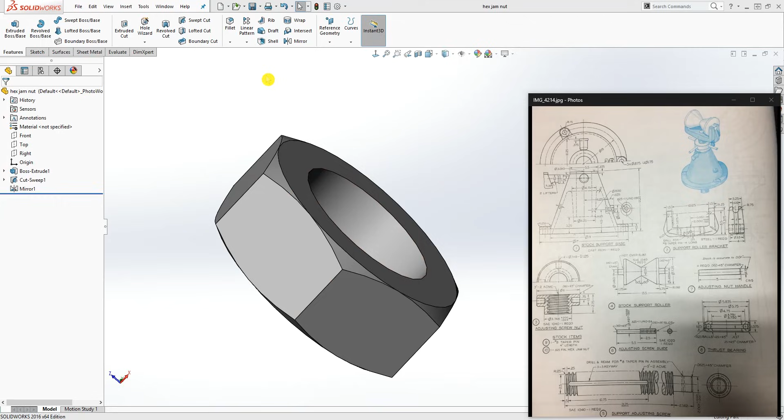So now we have designed all of our parts, and I believe your instructor is supplying you with the bearing. So we're just going to start a new assembly file and start putting everything together. New assembly, okay. And the first part we are going to bring in is the base, because that base is going to be fixed and everything else is going to be mated to it.

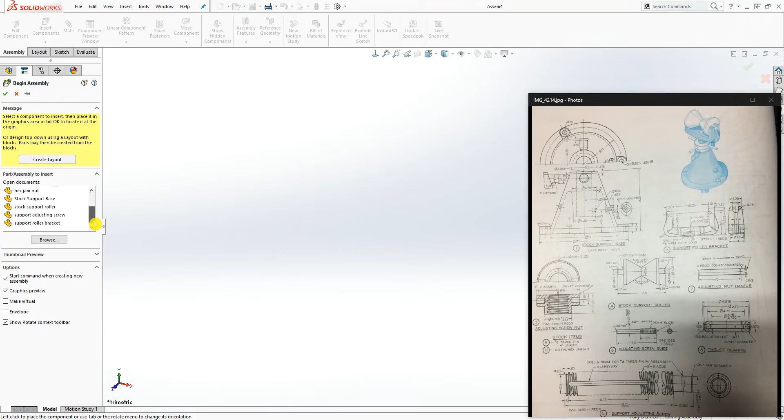So just browse. If you still have all your parts open, everything should show here to insert. I'm just going to find the base, the stock support base. I'm going to select that, and now I can move it around, but don't click in here, just click this checkbox to drop it, and that fixes it for you.

So that means the plane in the assembly and the plane for this part are both on the same plane and origin point, and this is fixed, which is the F. So now we have this part in, we're just going to bring in the rest, working from the bottom up.

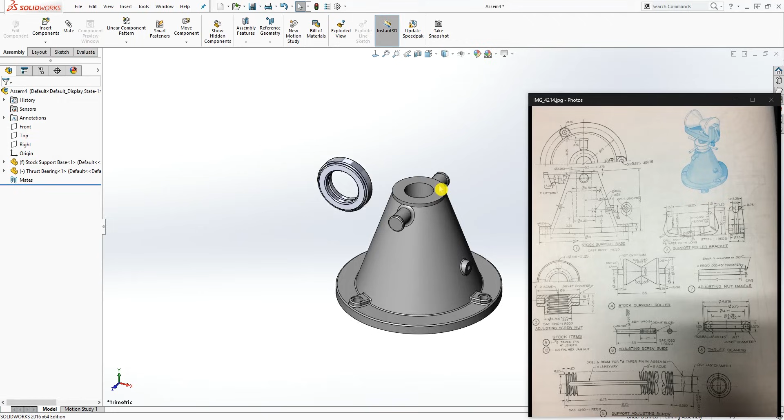So the next thing is the bearing. I'm going to insert components, browse to where I have the bearing, and bring that in. I'm just going to click once on the screen, and the mate I'm going to add is click mate, and click this face and this face. You want to make those two together, and I'm going to drag this up a little bit, and we want to mate this bottom face to this bottom face, and the top face of that, and click OK.

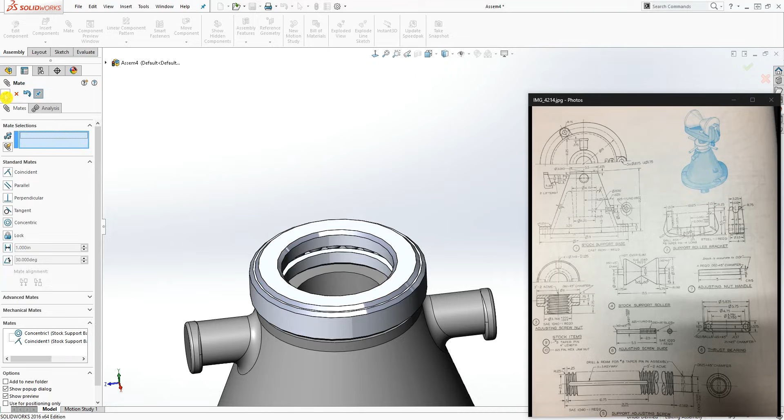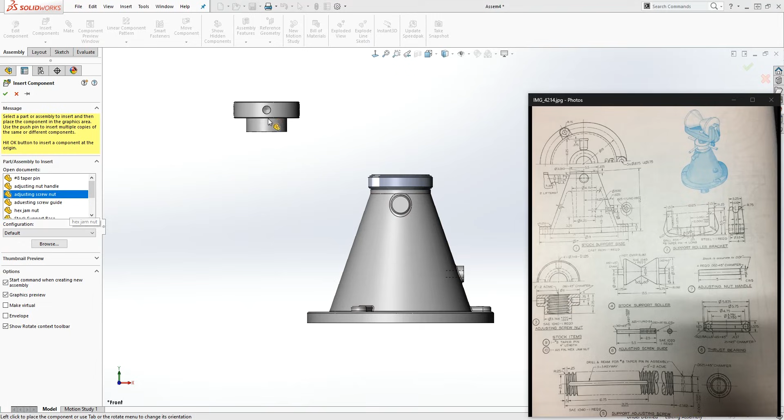And we are done with that one. That's the first mate we need. Now we are going to bring in our next part. I'm just going to go to the front plane of this. So bring in your next part, insert. Your next part will be this adjusting screw nut. Bring this in, and I'm going to select this.

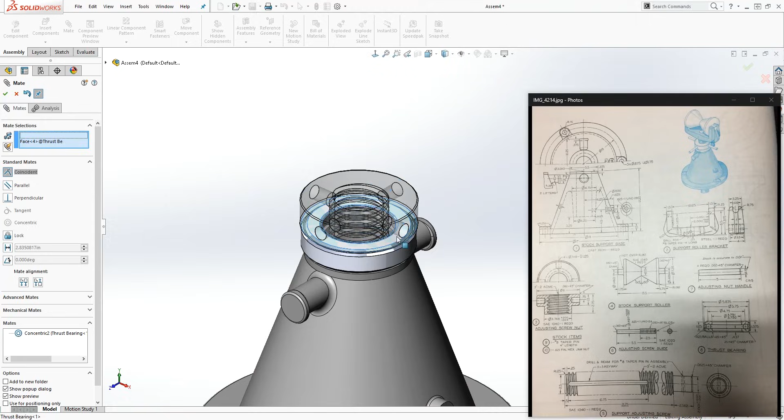You can mate, select this, any one works, this face and this face, mate those two together concentric, and we're going to select this face and mate it to that face, and click OK. Good, so now that is done, and the next part we can bring in is the adjusting nut handle.

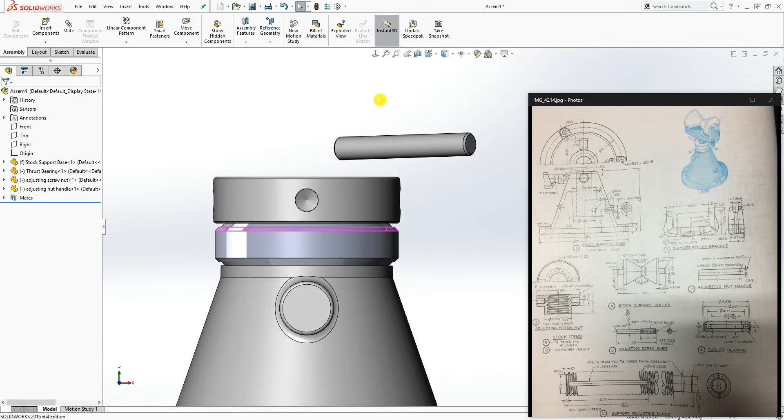So insert adjusting nut handle, just going to bring that in. I'm just going to, when we mate it, we want to fix it. So let me find the front plane of this part, which is right here. We want to be mating this to one of these circles, either this one or this one, because we are going to use this plane to constrain it. So you see what I mean. So I'm going to mate this face circle, that face to this face.

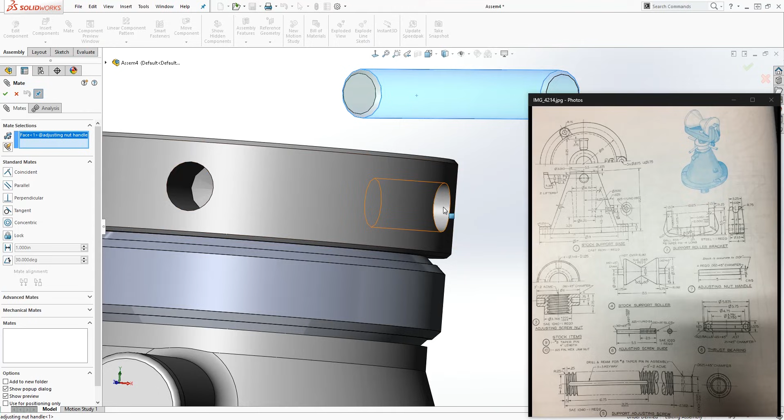That'll be a concentric mate. I'm just going to drag this out a little bit, and I'm going to mate this face to this inside edge, zooming in on the inside edge, and that will be coincident, and I'll click OK for now.

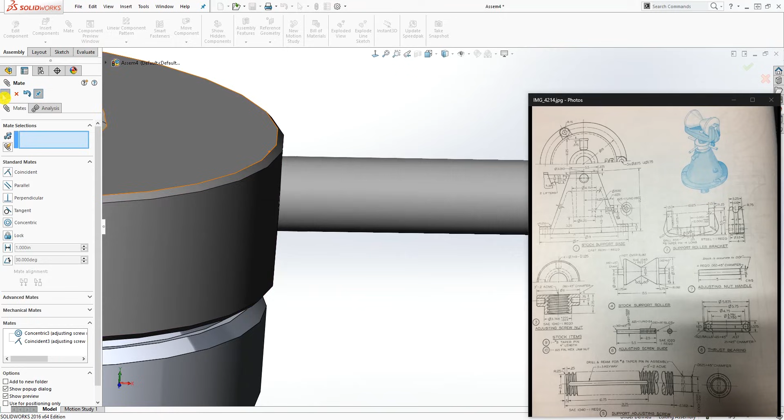And the reason why, see how this is still spinning, is that we want to fix it because we're going to be using this to spin it around. So I'm going to find, I think it's the, let me see, yes, the right plane of this.

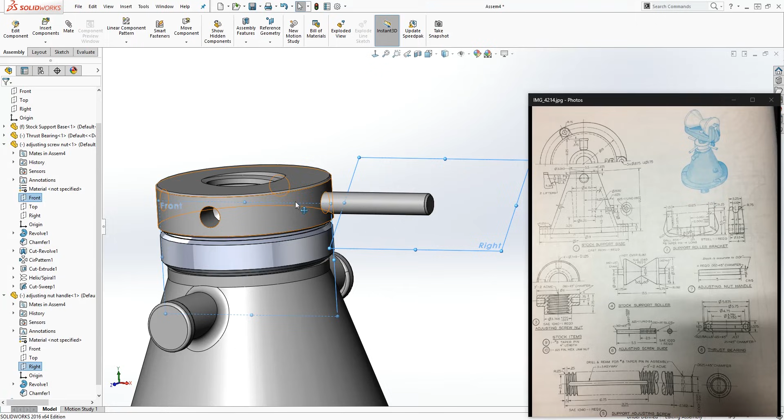So the right plane, if you click on this adjusting handle and drop down the right plane, I want to mate it to the front plane of that adjusting screw. So the right plane of this mated to the front plane, just mate the plane so that way they are both coincident with each other, and click OK. So now if I move this around, I can use this to spin that around, which is what I want.

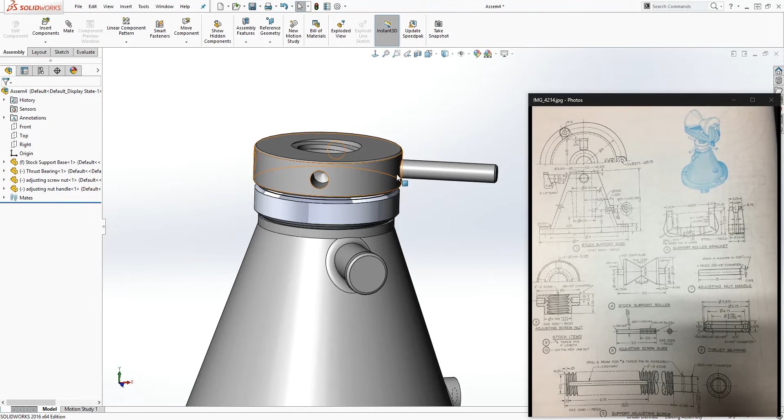Good, so I'm just going to minimize this, and the next thing we want to do is, instead of putting this in four times, we can use the circular component pattern. We select the circular edge and the components to pattern, select this, and use equal spacing four times, and that puts all those components in for us. We are done with that part, and we're moving on.

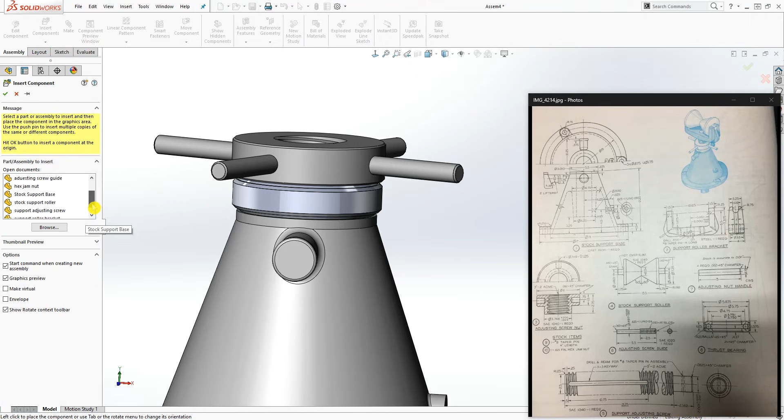The next part we are going to insert is this bracket. So browse, insert component, I'm going to find my bracket, support roller bracket.

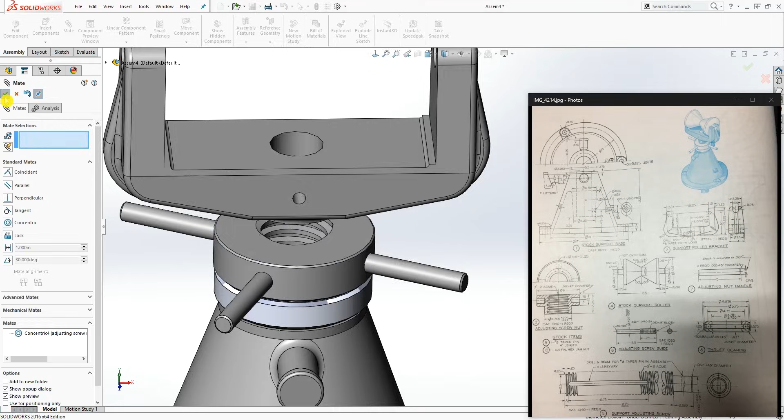Let's bring it in, click, and again we want to mate. You can mate this circular face. Any circular face you see, you can mate it to any circular face. So this circular inside, I can mate it to this outside, and that gives me the concentric, and that's that. So this part is moving up and down, but it's still spinning, but it's not supposed to spin.

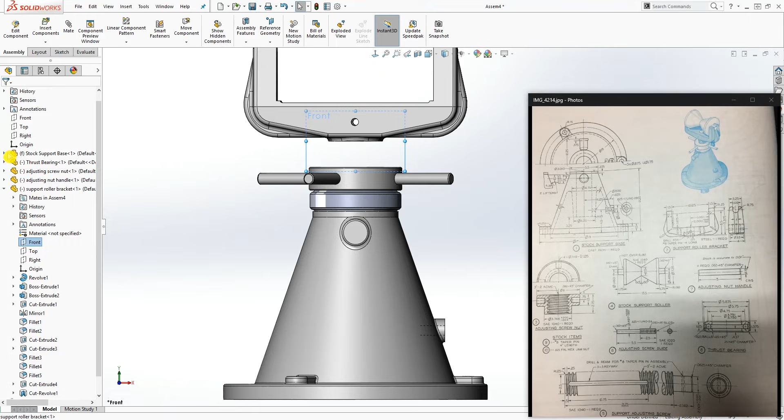It's supposed to stay fixed. We know this is the front, so let me go to the front. So that's the front view. And also make sure that this bracket, you are on the front plane of it, which we are. So now we want to mate the front plane of this bracket to the front plane of this base, because that's how we designed it. So the front and the front mate. So that gives you a coincident, and click OK and OK.

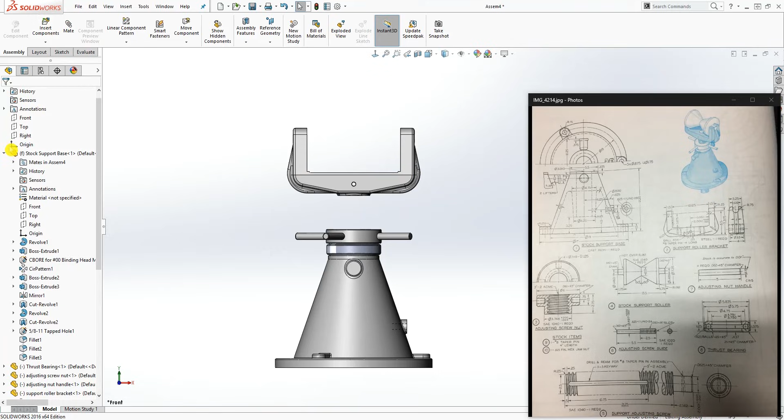So now this is moving up and down, and you can't rotate it, and that's exactly what you want. So that part is done for now. And again, we are going to insert our next component, which is going to be this part, and that is the stock support roller. So you can browse, or if you have it open, it should show up in here, and I'm just going to bring it in.

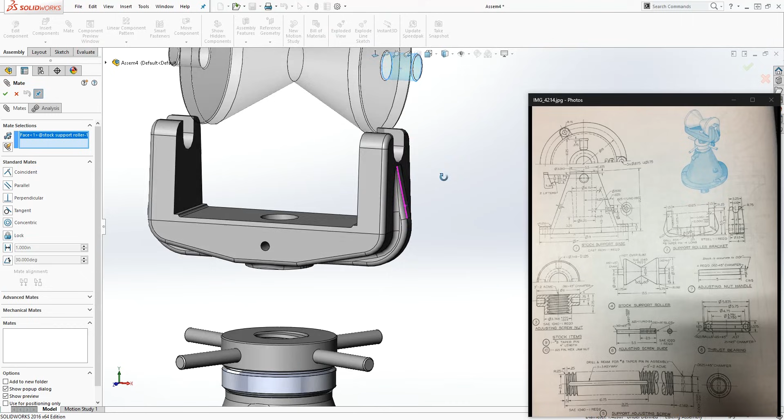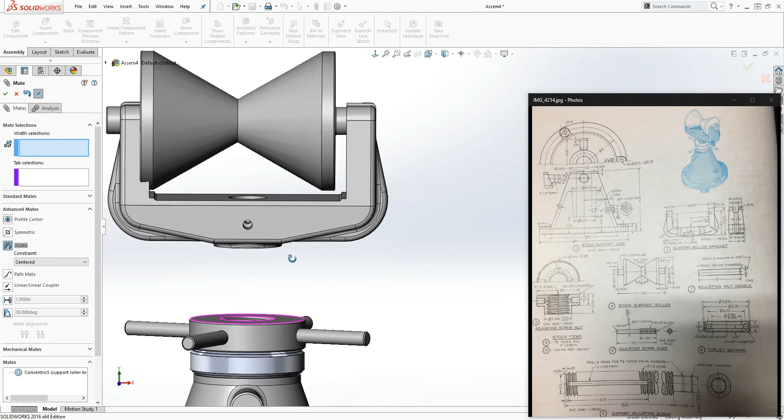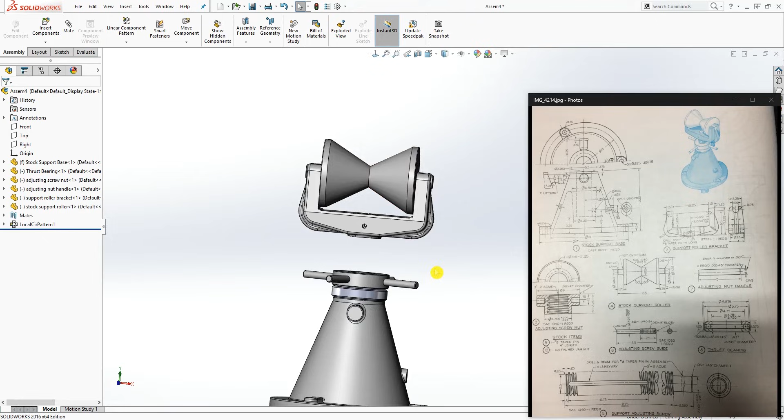Mate, you want to mate this face to that circular face, and concentric, and click OK. And then what we want to do is we want to center this about this. So what you can use to do that is come to advanced. So the drop down to advanced, you want to use this width. So how this works is the outside edge that are the widest, you want to select that first. So we'll select this face and this face. And the inside edge, we are going to select this face and this face. So what that does is it centers that around those two faces, and click OK and OK. And that part is done. So we have that now.

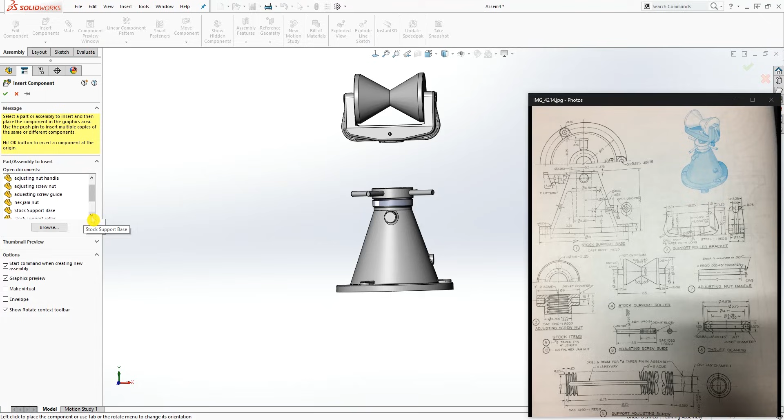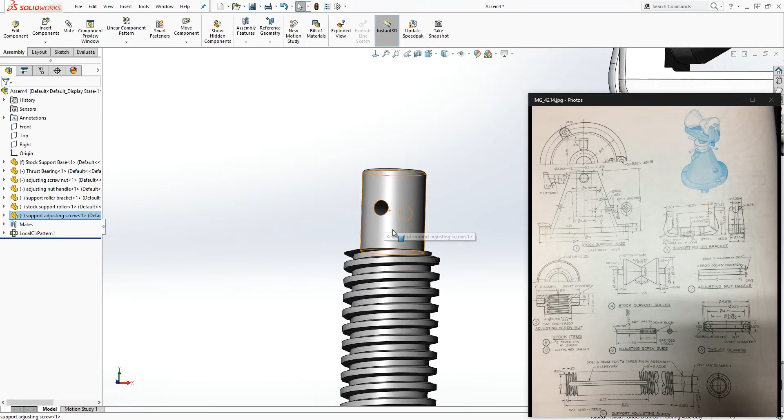And the next thing we want to do is bring in our, let's do this one first. We'll bring in this, no, let's bring in this screw. So insert component, what's that called? Support adjusting screw. So I'm just gonna find my support adjusting screw, which is this. I'm going to bring this in, and looking at this keyway is supposed to be facing this side. So you can do it now or later, it doesn't matter. And you see how this keyway, another thing, the wider part is supposed to be facing us. So and now everything will make sense to you in a bit.

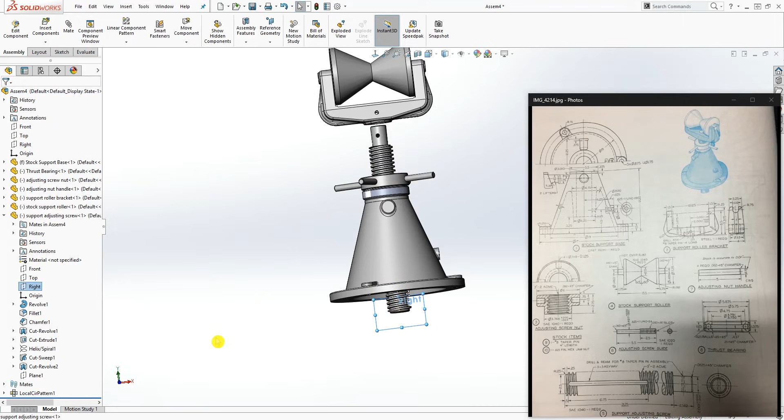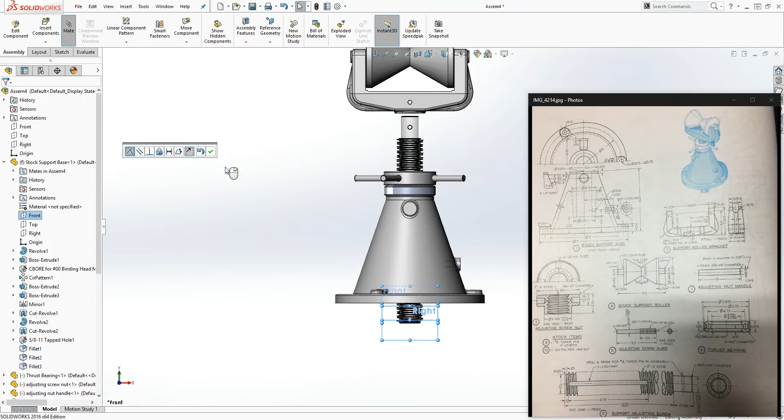So we want to mate this circular face to any circular face, it doesn't matter. So that gives you the concentric. And I kind of spin mine in the right way. So what I can do now is this adjusting screw, I can find the right plane, which is right there, and I can mate it to - let me make sure. So this is the front plane. So this base, if you click down, we want to mate it to the front plane of that base. So the right plane of this, mate it to the front plane, and that gives you that, and click OK.

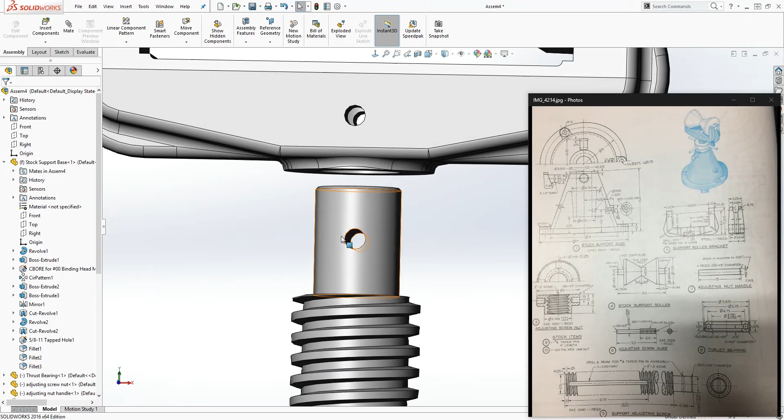And I'm just going to section it just to make sure I'm doing the right thing. So the reason why I did that is because you see this keyway is supposed to be facing here. And another thing you need to make sure is that the larger tapered hole is facing the front view. So I think I have it right. And now we want to apply another mate, which is going to be the top face of this. It's going to be coincident with this face, and click OK. So now this moves this up and down.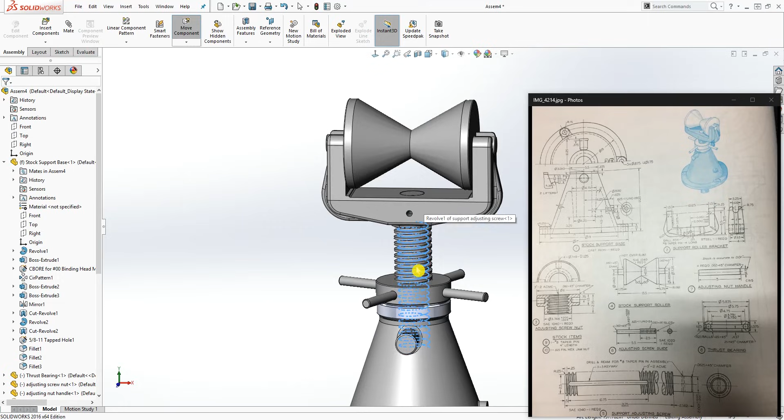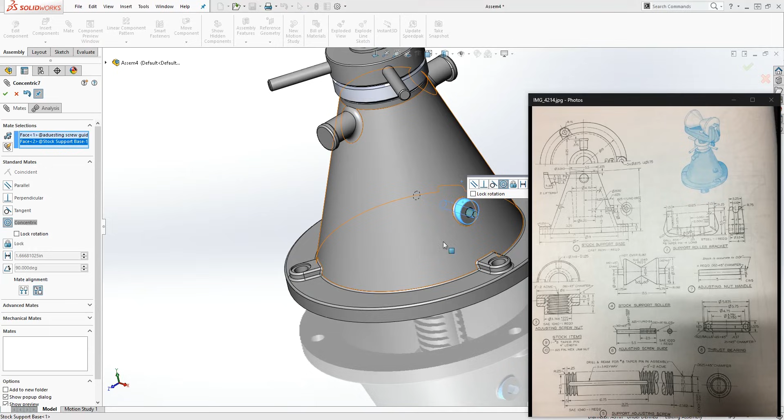Good. And the next thing we need to do is add this, the adjusting screw guide. So insert adjusting screw guide, I'm going to bring that in. I'm just going to click over there and drop it, and mate. So I'm going to mate, click any two circular part, and that gives you concentric, but my key thing is pointing in the wrong direction, and I can use this to flip it. So that flips it in the right direction, and click OK. So I have my concentric, and this face is going to be tangent to this inside face, and that's what we're going to do.

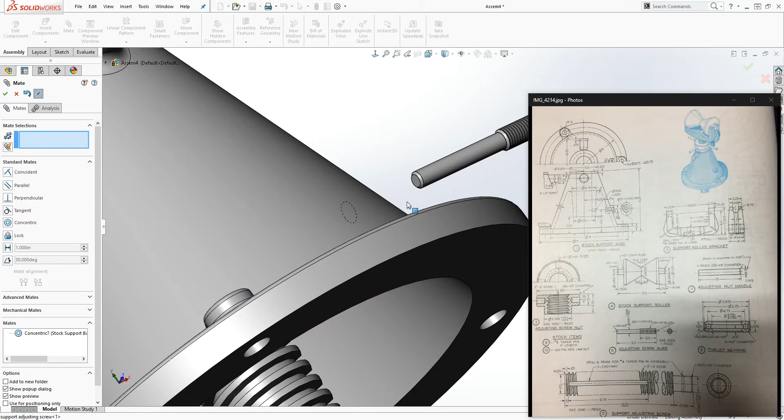So click, I'm still in the mate, click this face and click this face, and that gives you the tangent constraint, the tangent mate. Click OK, and that is how that should be, and click OK again.

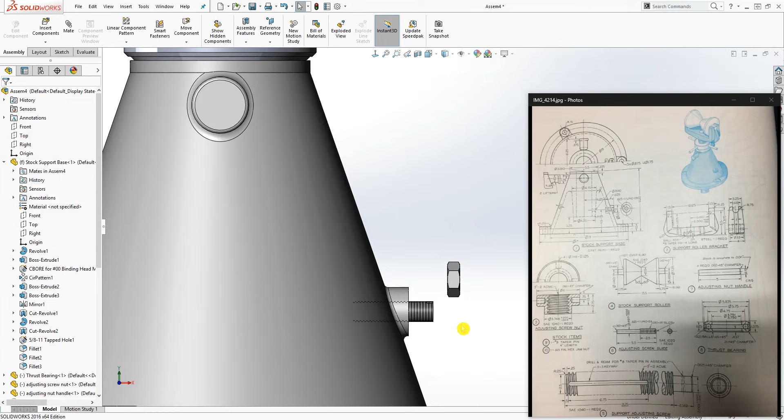Two more things we have to bring in. I'm going to insert components and bring in the nut, the hex jam nut. I'll select this face and select that. So for the mate, I want to mate this face to this face. Good. And I want to mate this face to this face. Good.

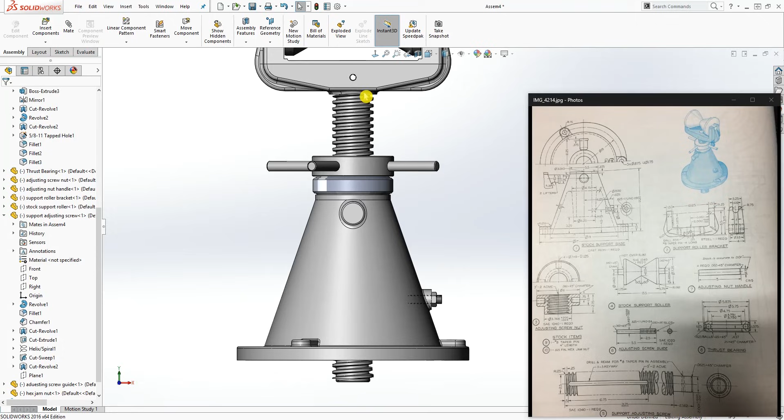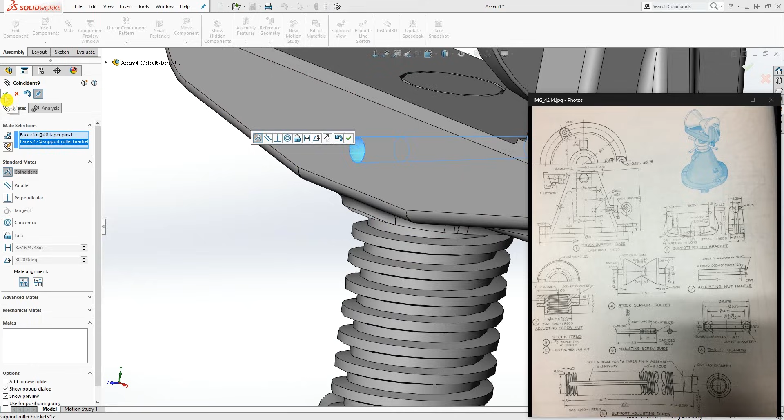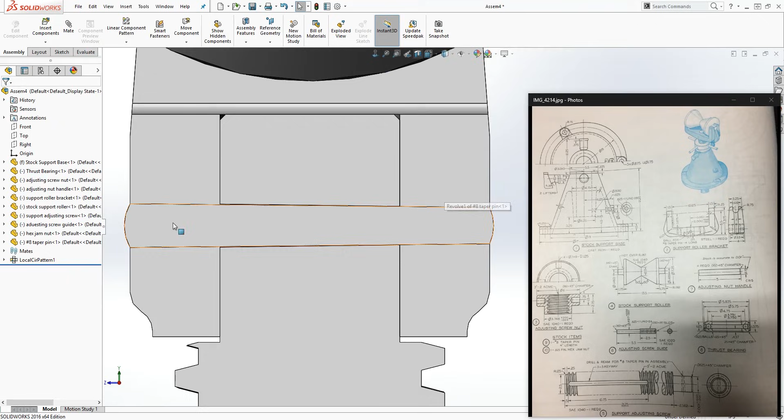One more thing: we have the tapered pin, so I'm going to bring that in again. Tapered pin, and I'm just going to put that right here. The larger part is facing my front view, so I'm going to click mate and mate this face to this inside face. That actually puts everything coincident for me because of the way we designed it, which is exactly what I want. So everything is going where it should go. I'll click OK, and let's section this to make sure we have that right. If I section it about that plane, you see my pin is going in, and it's not actually being coincident with anything—it's just going in, and that's exactly what we want.

So this part is now completed. We have all of our mates in, and the next thing your instructor wants you to do is add a screw mate, so that anytime you rotate this, it actually screws up and down.

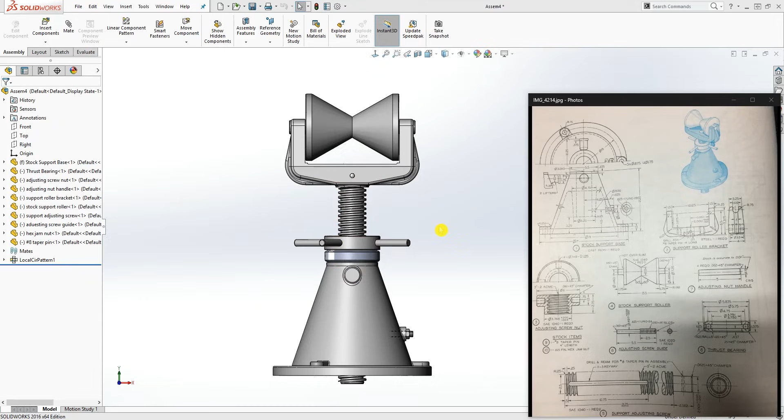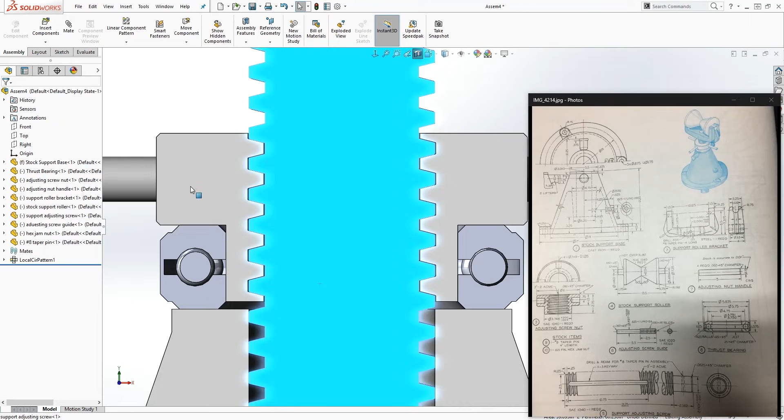So how you do that is I'm going to section this for now, about this plane and about this plane, and I'm just going to move this down and zoom in. This is another way you see how we design our screw—everything looks good, that this external thread is actually threading into your internal thread. Before I make my screw, I was moving it this way, so I have my thread in the position it's supposed to be. This is just an estimate, it doesn't have to be exact, just put it somewhere over there. This is how I do it, it works for me. If you have any other option or a better way, please let me know—I'd love to learn from you. So I have it this way.

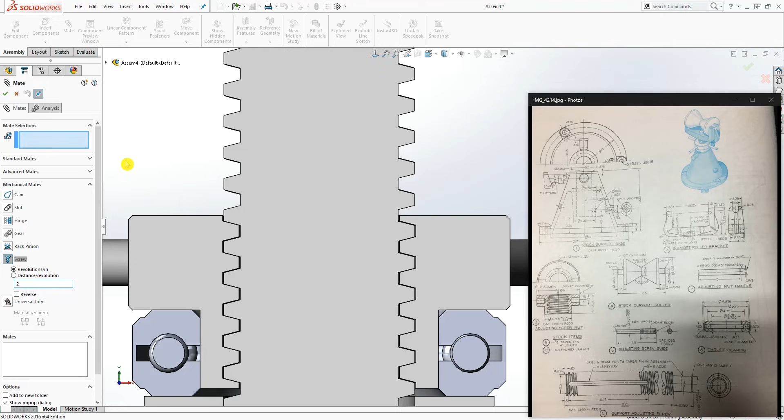To do your screw thread, you come to mate, mechanical, and you want to select the screw. For this thread, it's two threads per inch, so over here we're just going to change the revolutions per inch to 2. For the face, we are going to select—if I move this way, I'm going to select this face, that's the inside face of that. I always like selecting it over there.

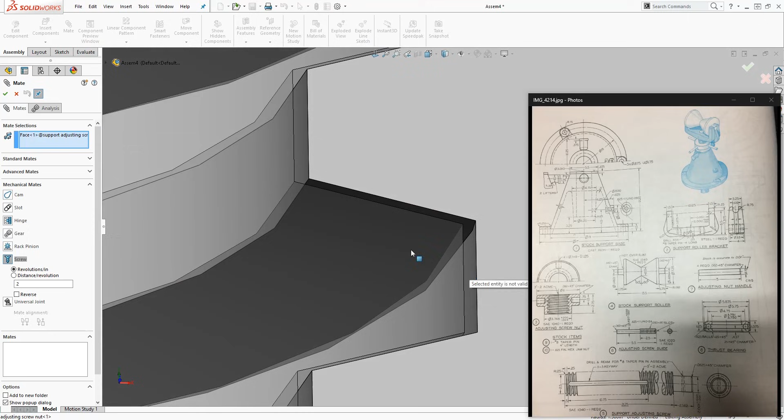For the second face, I'm going to select that inside face of my external thread, my internal thread—see that face, so I'm just going to click. While in here, I'm going to click that face. Oh, it's not letting me—I'm going to click this face instead. Any of those faces should work as long as you're getting the face for the internal threads. So I have my face 1 and face 2, and this number again, change it to 2, click OK, and OK.

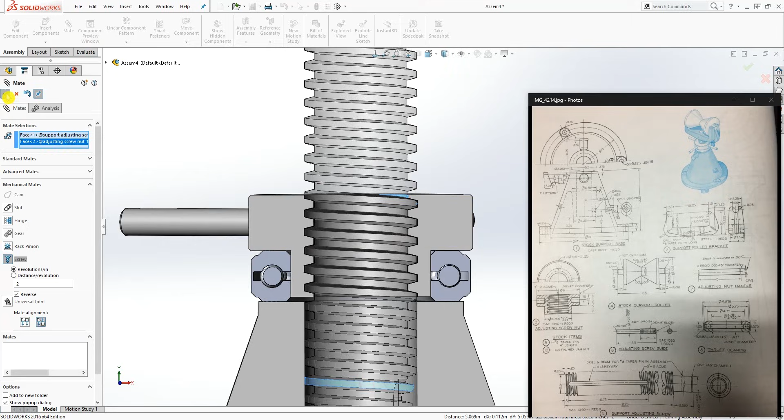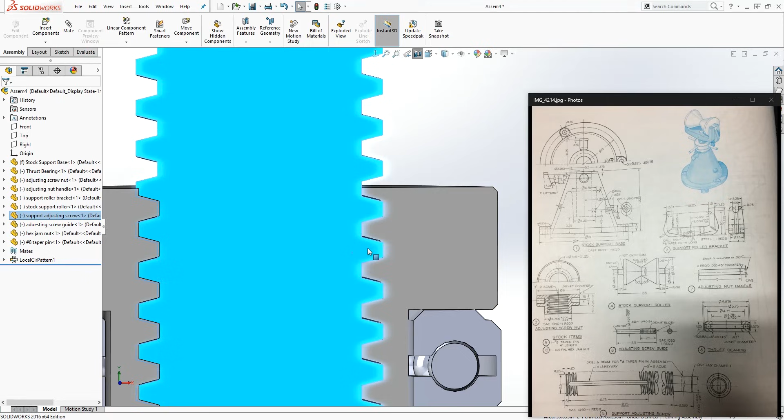Now when I move this up and down, you see that it's spinning. What I'm trying to make sure is that anytime you move it up and down, your external thread stays in your internal thread, and isn't just floating over here. So as I drag this up and down, it would always be on the inside. I don't know if you can see it, but it would always be on the inside.

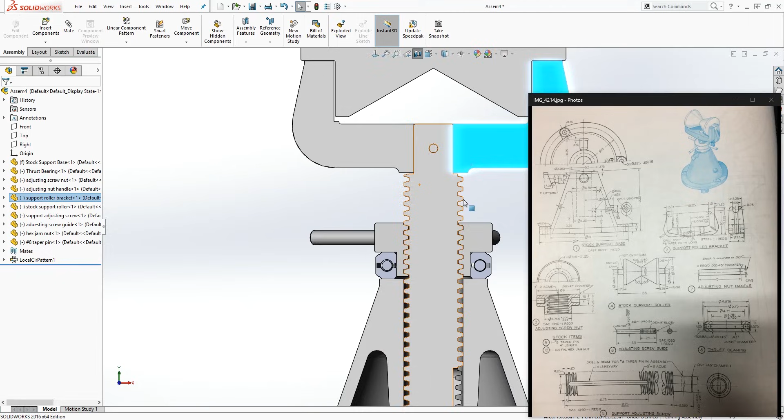So for your screw thread, all you want to do is select, when you position it, this face and any face of the internal thread, and that should give you this mate. I'm going to unsection that and make this transparent so you can see it. As you can see, that is over there. When I move this up and down, you can see that thread going in and out—this thread is not showing up in this area.

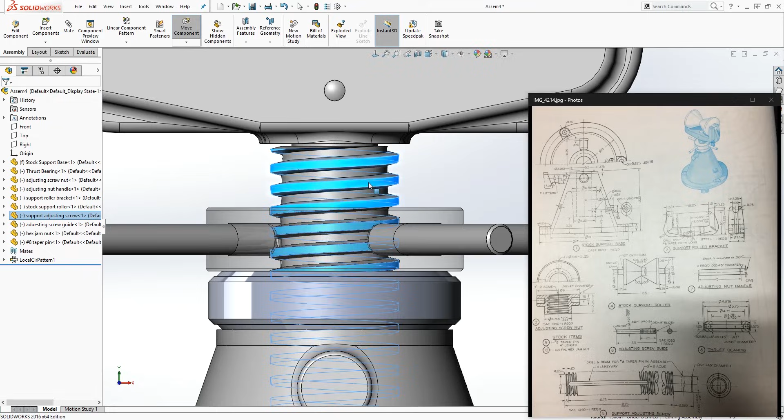Look in this area - those threads should not show up in that area at any point. That's how you know you've done it correctly. So moving on, I don't want to waste too much time on that. If you have any questions, just leave a comment and I'll be happy to help.

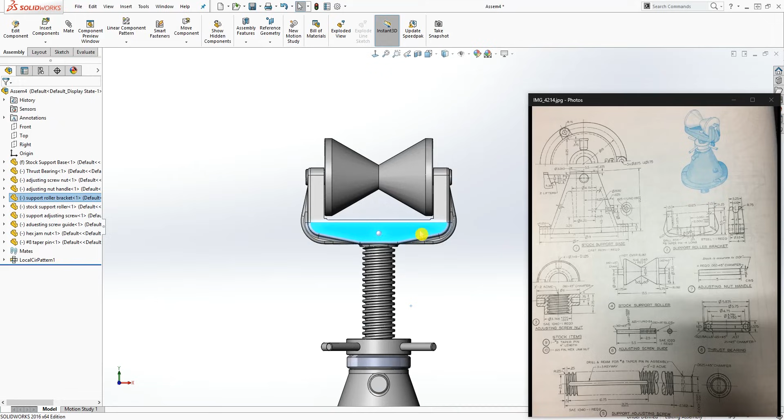I can also send this model to you as an example to look at. So that's your screw thread, your homework assignment is pretty much completed. But now look at this - this is bleeding into this part, and you don't want that. Or this part, I can drag this part out, and you don't want that either. So what you want to do is add a limit constraint to it, so that anytime this part touches that part, it stops.

So how you do that is, I'm going to bring this up and go into Mate, Advanced Mate. You want to select the limit, which is this one, and we're going to be using this one, the first one - the distance limit. So change this number to 0.

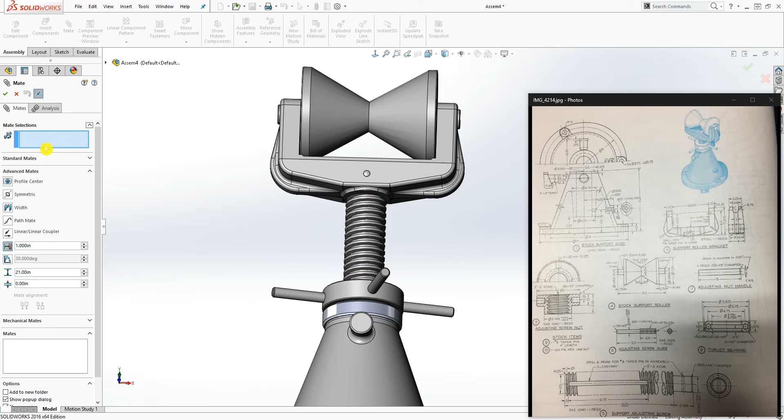This number is always 0 because that's how far up and down that can go - that's the minimum value. For this one, just put 21 - that's how far this will go up and down. The face you want to apply these mates to is this face and this face, and 21, click OK.

So now you see we've applied this mate. So when I move this up and down, when I drop this part, it doesn't bleed into that part.

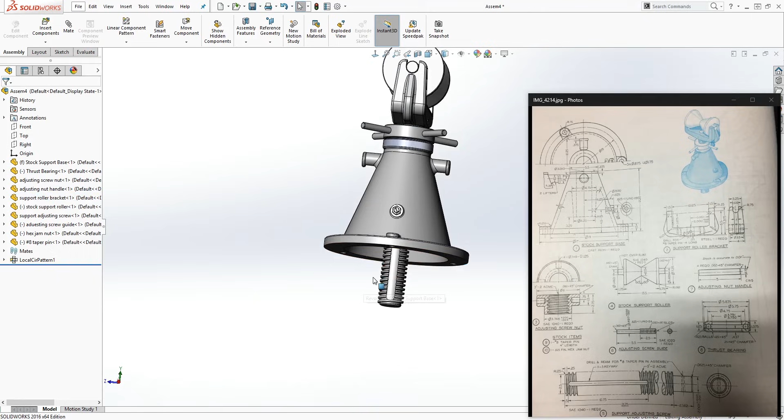Now we need to do the same thing at the bottom. The reason I worked with this part earlier, and this face you can't select, is just because of how SolidWorks is acting up - it doesn't let you select this face. Which is why when we made this screw, I told you to make a plane that is coincident with this face.

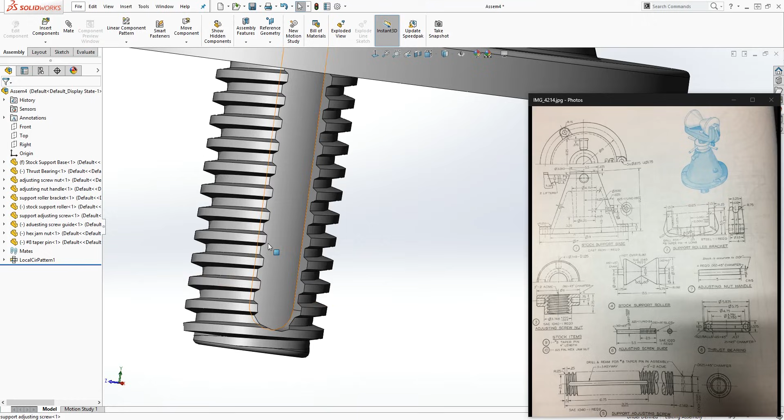We'll be using that plane to apply the limit mate. So what I want you to do, and you have to do it in this order for it to work - bring this part down until it's touching that. Let me go number 2, bring this part down until that face is touching. Once you have something like this, click on this drop down.

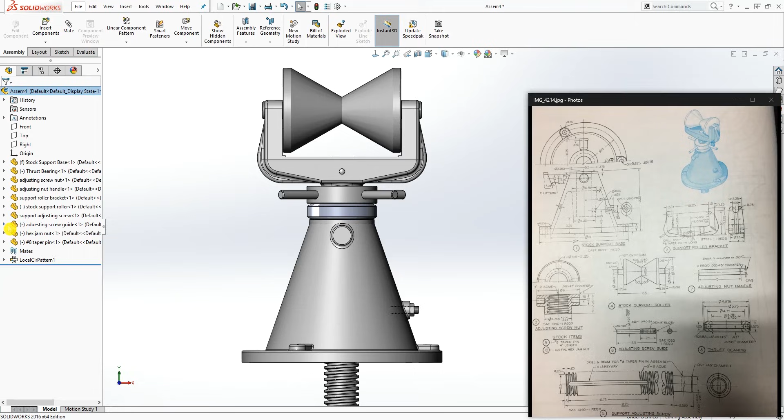Which one is this part? Yeah, this support adjusting screw. Click on the drop down and select this plane 1, and now select Mate. You have to do it in this order for it to work - I don't know, it's kind of weird. So you have your plane 1 in here.

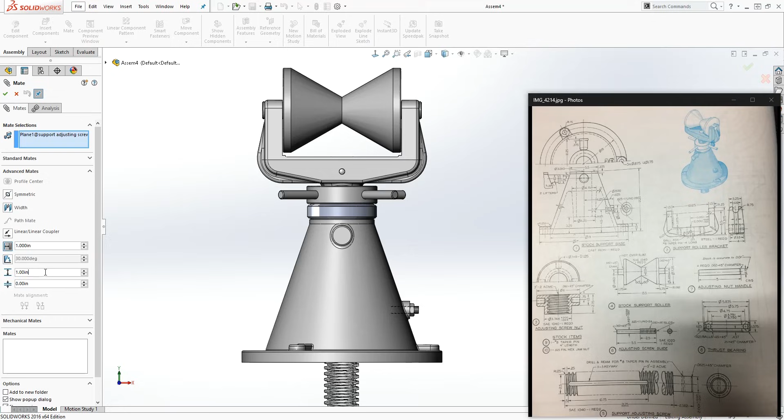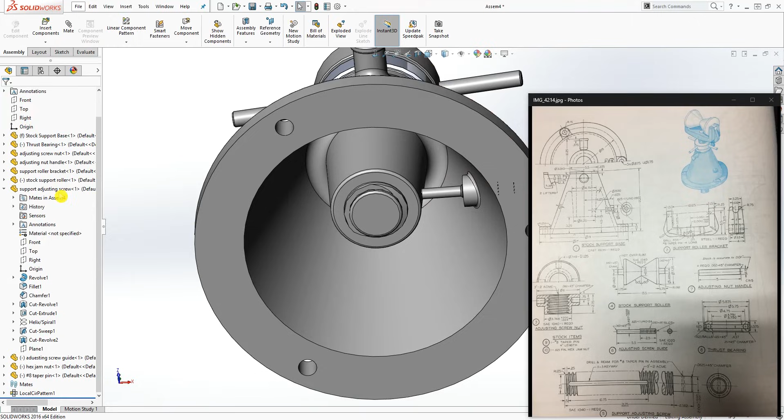Now go to Advanced, and you want to select this limit mate - this is going to be 0, and this is going to be 20. Now that plane is selected. Now you want to select this face over here for that - these numbers, this is the same numbers you want to have. Make sure you select this and 20, and click OK.

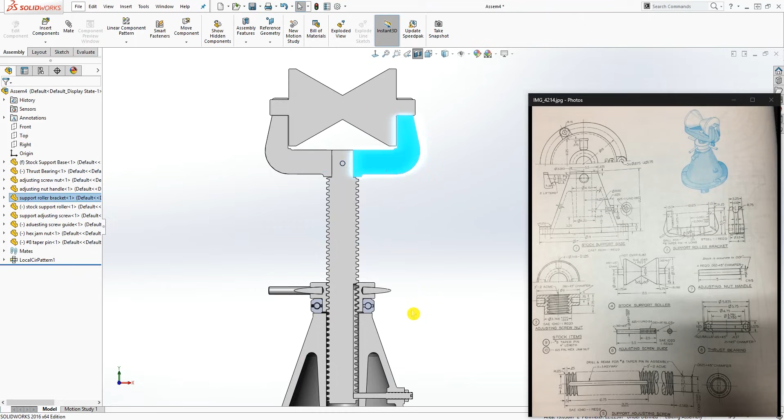And you see it was giving you that error, but it still worked - so now it's not really an error, it's a warning. So now if I section this, you see what's going on - if I pull this and drag it down, it stops over there, and if I pull it up, it stops over there. I'm going to zoom in - take this, drag it down, stops, drag it up, stops. So in actuality, that's how it's going to work.

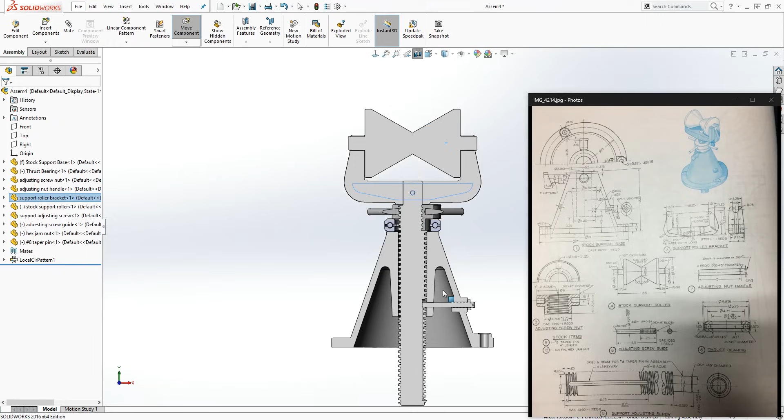My thread is staying in the thread, and that's pretty much completed - I hope I explained this very well. I'm not even going to bother adding materials to it. You can apply the material yourself, or in another tutorial I'm going to use the same assembly and do a tutorial on how to apply materials in the assembly and on the part file.